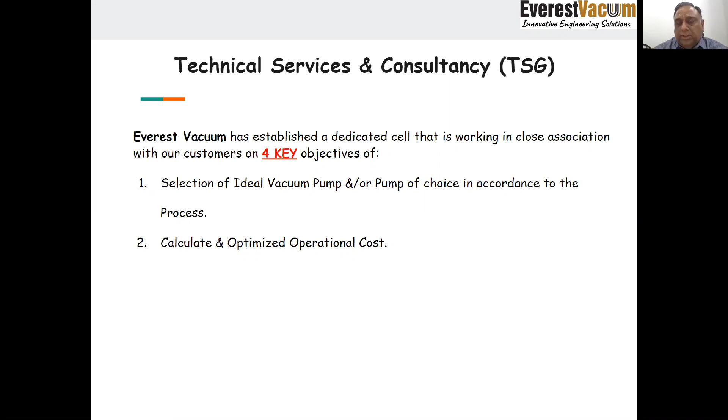So to achieve the mission 555, at Everest we have created a technical services and consultancy group. What does that group do? It has 4 objectives: selection of the ideal vacuum pump or pump of choice according to the process, basically optimizing the correct product for the right application; calculate and optimize the operational cost; right sizing of the vacuum pump for best results in terms of productivity as well as cycle time; and deciding the desired operating vacuum levels for the process to get the best yield, product quality, and operational costs.

What's important for all of you to understand is that TSG, if used efficiently, can support all your key initiatives for vacuum requirements, both in terms of selection as well as ensuring a higher level of productivity and throughput.

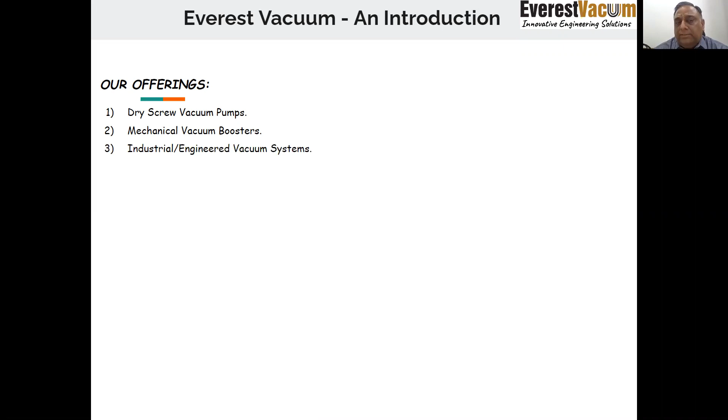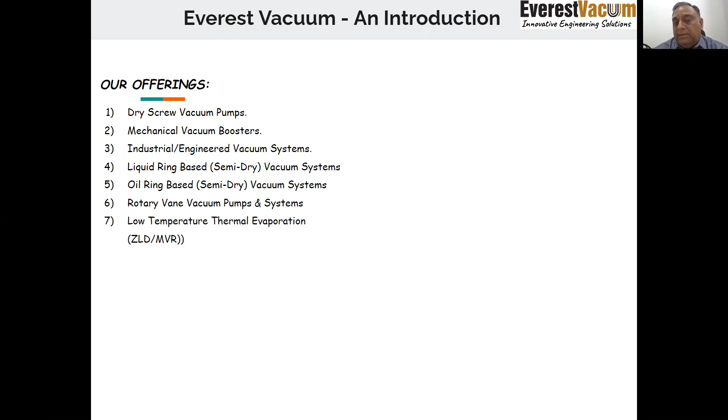So what all does Everest Vacuum do, and what are our offerings? We are into manufacturing - we are the only manufacturers of dry screw vacuum pumps in India. We also have our own in-house manufacturing for mechanical vacuum boosters. We do design as well as manufacturing of customized industrial engineered vacuum systems, which includes liquid ring based semi-dry vacuum systems, and also oil ring based vacuum systems. We also have the portfolio of rotary vane vacuum pumps, as well as configured engineered systems along with other peripherals. We are also into low temperature thermal evaporation, which is zero liquid discharge or mechanical vapor recompression.

And by usage of these offerings, what is our promise to our customers?

We ensure clean, reliable, and sustainable vacuum, improved product yield, deeper and consistent vacuum, cost and space saving by right sizing, reduced batch cycle times, and reduced operational cost. Once again, welcome to all of you.

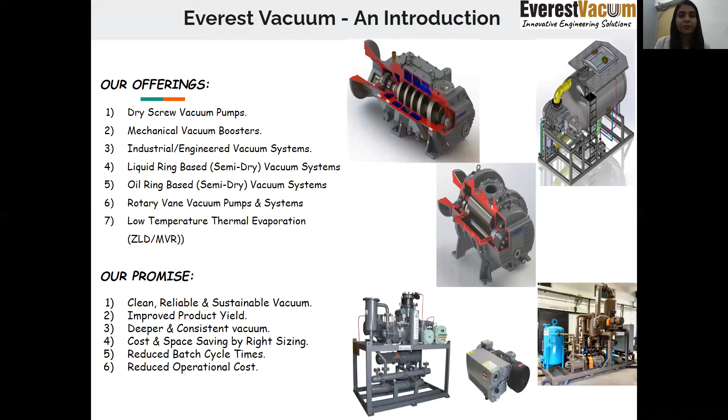So I welcome you all once again into this session regarding the operation and maintenance of dry screw vacuum pumps. I'll basically start with what we can expect out of this product. There are multiple benefits, multiple features of this dry screw vacuum pump.

It doesn't use any steam and there is no requirement for it, thereby leading to 80% power saving. There is no effluent generation in these dry screw vacuum pumps. They provide consistent and reliable vacuum levels, and by optimized sizing we can enhance productivity upwards of 20%. It is a clean, green, and environmentally sustainable vacuum solution, and we supply all these systems as plug-and-play compact skid-mounted units.

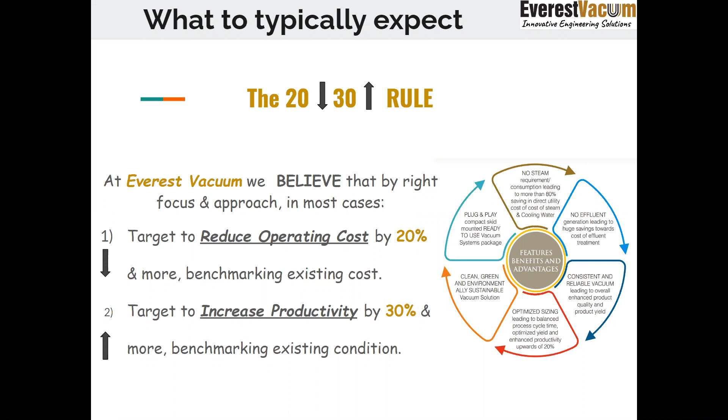At Everest, we have a 20-30 rule, which means we believe that with the right focus and approach, in most cases we can reduce operating cost by 20% and more, benchmarking the existing conditions. Likewise, we can increase productivity by 30% and more, benchmarking existing conditions. This has been proven at many customer sites, including some of your plants as well.

So coming to the webinar part, as this is about the dry screw vacuum pump, I would like to briefly start off with what a dry screw vacuum pump actually is. As the name suggests, it is a completely dry pump.

There is no oil and no water contamination with the process vapors, which is why it is called a dry screw vacuum pump, as opposed to traditional wet technologies, where the process vapors come in contact with either oil or water, thereby contaminating the process. This is drastically different—completely dry, and thereby extremely environment friendly.

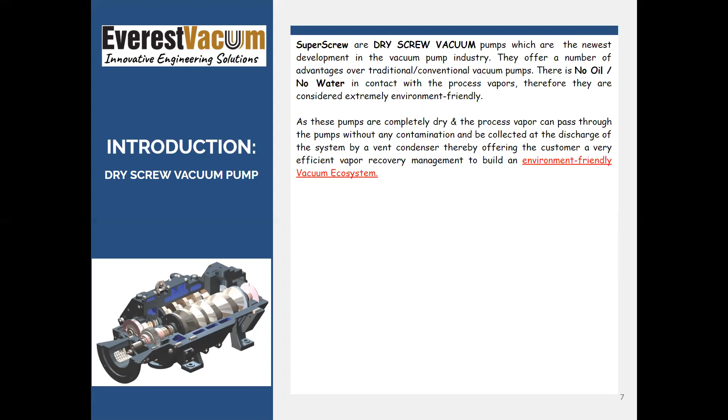Since these are completely dry pumps, the advantage is that they can directly handle process vapors, which can be collected at the discharge by condenser, having condensation at the discharge. It's much easier to condense the process vapors entering the pump there. This leads to a very efficient vapor recovery management system and ultimately creates an environment-friendly vacuum ecosystem.

As these pumps are completely dry, there is no sealing fluid inside, so they offer clean and oil-free vacuum levels. This pump is the latest technology available in the market, with very low power consumption, leading to lower overall cost of ownership. This makes our endeavor a success, making the vacuum utility a reality.

The hybrid combined variable pitch is the latest third generation that Everest is supplying. This is primarily a combination of three different pitches: primary, secondary, and the variable pitch.

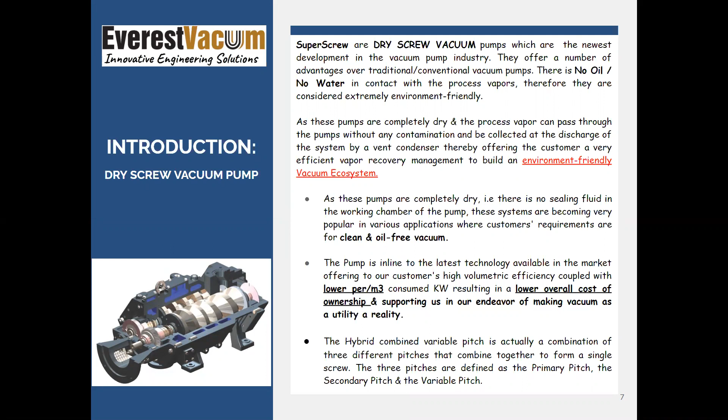Now coming to the operation and maintenance part, there are certain markings and stickers available on the pump. I just wanted to brief you all on what markings and stickers are available on the pump.

As you can see, it is a dry screw vacuum pump. There are certain stickers engraved on it, like for cooling water inlet, as it has a cooling water jacket to dissipate heat. From one end towards the discharge there is a cooling water inlet, and towards the suction, that water comes out as cooling water outlet.

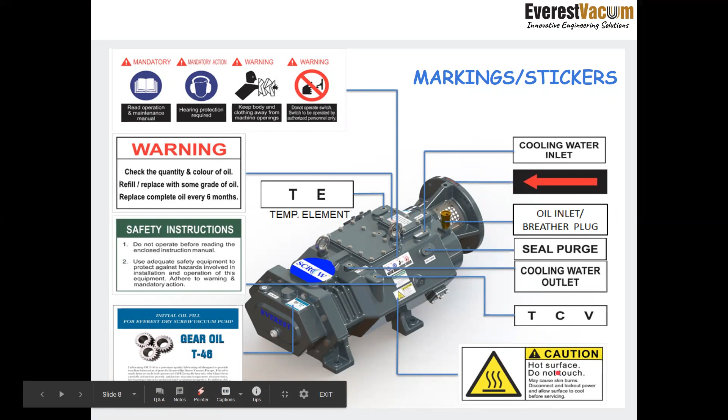Likewise, it is lubricated with oil on both sides, so there are oil filling ports, and the oil grade is also mentioned, indicating what grade of oil is to be filled. Then there are certain cautionary signs indicating a hot surface. For our CX series, the anti-corrosive series, there is a temperature control valve.

We can also get in touch with the temperature control if required in certain applications. There are certain warning signs to check the quantity and color of the oil, and the same needs to be replaced once it is dirty or after 6 months.

Coming to the safety instructions, it is well known that we should not operate the pump without reading the operation and maintenance manual. So this is all on the part of markings and stickers.

Now once the system is supplied, it goes into the plant wherein it is installed, and the commissioning comes into play. Commissioning is a very critical activity. We have a full-fledged team of our engineers who commission the systems pan-India and abroad, and it is very important because they identify any areas that need fine-tuning to achieve the optimum results.

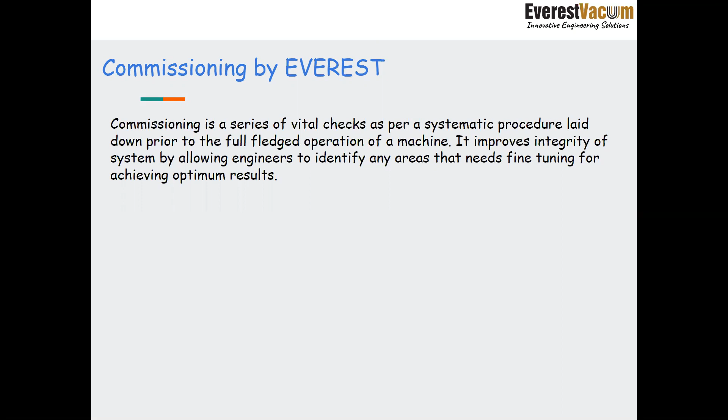Now, why is it important? Because once the system is commissioned, the customer representatives get trained on the machines and become aware about the vacuum systems. Basically, every system that we design has an inbuilt PLC logic, and it has to be run as per the standard operating procedure.

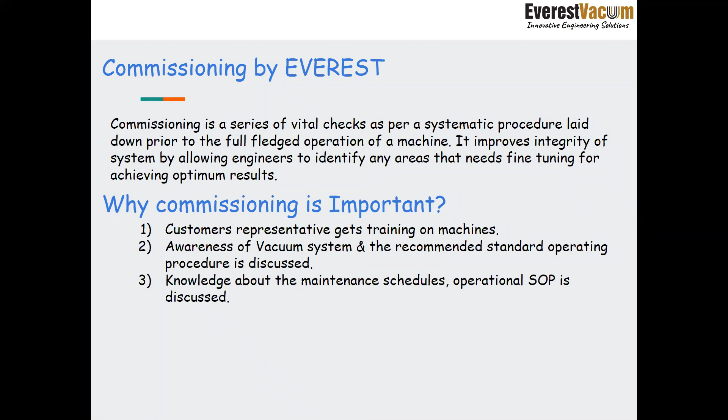During the commissioning, our engineers, when they visit the site, get in touch with the customer representatives, train them, and convey the SOP that has to be followed. So that is important - they get to know about the maintenance schedules and operational standard operating procedures, the user gets friendly with the system, and the operators adhere to the SOP.

And most important, customer-vendor interaction gets available at the personal level, which is important for the success of any equipment.

This is proven - we have commissioned many systems, and the thing that has come out is that a well-commissioned system, if it is being run in accordance with the operational SOP, can deliver up to 3 times more service on an average before maintenance. So that much criticality is there in the commissioning. We should get our systems commissioned, and standard operating procedures should be adhered to.

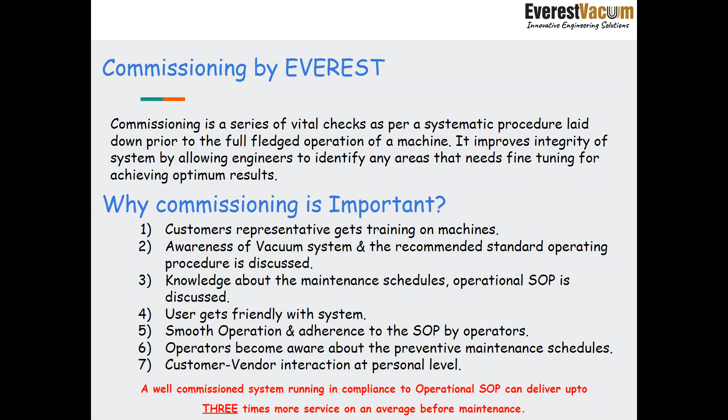So what all are the modules that we need to maintain for the operation? The key modules include a healthy electrical power supply - it should be having a healthy 3-phase power supply. And then nitrogen needs to be available.

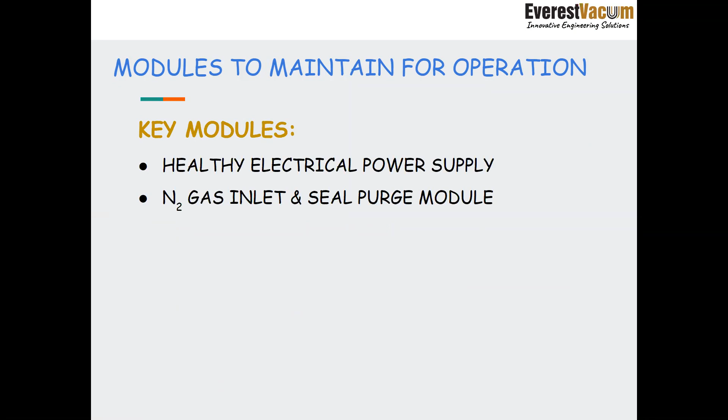There are N2 modules - inlet and seal purge modules. Instrument air for the butterfly valves or any other electropneumatic valves available in the system. Then there is solvent flushing to flush out the pump from any contaminants. Gas ballast to run the pump hot and to avoid condensation inside the pump, and a cooling water jacket module to dissipate the heat as well. So all these modules need to be maintained to function the system properly.

And lastly, there are certain utilities required like cooling water or chilling water for the condensers or any traps built into the system.

Now, installation instruction - this is basically the complete overview of how the system looks, and what precautions are to be followed. As you can see, this is a dry screw vacuum pump, and then there is a post condenser. As the condenser is at the discharge of the pump, we call it a post condenser. In some cases, it can even be at the inlet of the dry screw vacuum pump, in which case we would call it a pre-condenser.

Then there is a receiver which collects the condensate, and a solvent tank which contains the flushing agent to flush out the pump. So as we all know, dry vacuum pumping systems or any vacuum pumping systems are basically meant to pump out the non-condensables along with the saturated vapor loads.

Now dry pumps have the advantage of being able to collect the condensate at the discharge. Still, we need to ensure that only a minimal amount of carryover enters into the vacuum pump. To ensure that, we mention that we need to install a catch pot or trap prior to the pump to reduce the carryover load on the pump. The basic fundamental is that its line size should be equal to or greater than the pump suction line size.

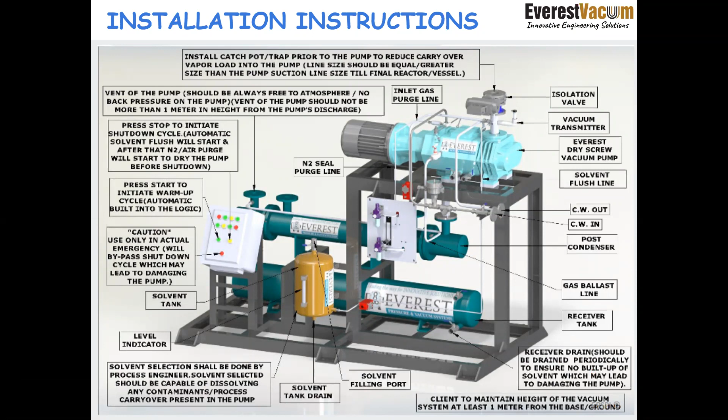One important thing is that this receiver should be drained periodically. There is a local operating station mounted on the skid itself having three basic push buttons: start, stop, and emergency. In many cases, clients have been operating the systems via the emergency button, stopping the system using it, which is highly not recommended. The reason being there are certain modules pre-fit into the PLC like start cycle and shutdown cycle. So once it is directly shut down, that stop cycle won't operate and the pump won't be cleaned. There is a caution that this emergency switch has to be used only in case of actual emergency, otherwise it may seriously lead to damage of the pump.

So during the startup, only the start button has to be pressed. It will automatically initiate the warm-up cycle inbuilt into the logic. The same is for the stop cycle as well - only the stop button needs to be pressed, and there is an automatic cycle that will come into play.

Another important thing is that solvent selection is very critical. We should be selecting such a solvent for flushing purposes that is capable of dissolving the contaminants, or process carryover, entering into the pump. So these are the basic installation instructions - how the setup should be followed and how it looks like.

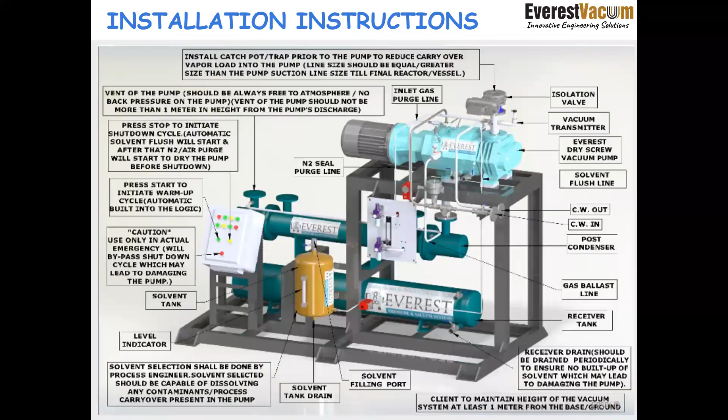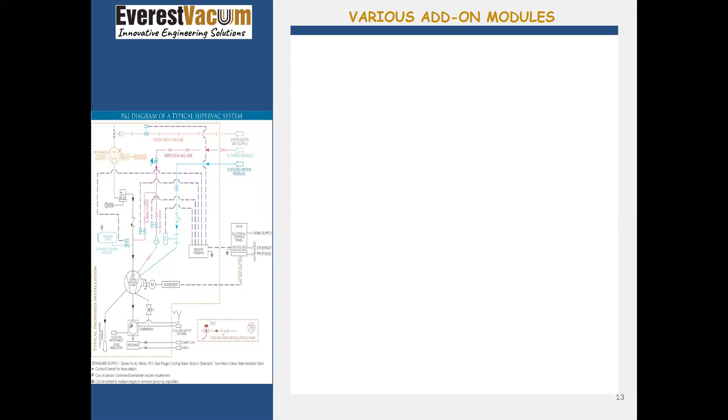So these are the modules that I was discussing in the last slide. This is also mentioned in our standard catalogs. This is a typical P&ID diagram on the left, and these are the various additional modules that Everest brings into the loop.

So the various possibilities to add on are: there can be cyclone traps to trap any particles prior to their entrance into the pump. Then there could be inlet filter housings depending upon the micron ratings - it could be either 1 micron or 5 microns. It depends on what kind of process we are into, and what particle sizes will enter into our pump.

There can be a possibility of having inlet pre-condensers. In case of supervacs, having a booster in combination with screw pumps, it could be possible that we need to trap the vapors intermediately. So there is a possibility of having an intermediate condenser module as well.

Then there are filter traps, and certain traps with demister, depending upon the process. As shown in the last slide, there can be post condensers. If there is no condensation available at discharge, then there is a standard discharge silencer available. Then there are other modules like N2 seal at inlet, which I will cover later in detail, and a solvent flushing module, gas ballast module. All these modules will be covered in later slides in depth.

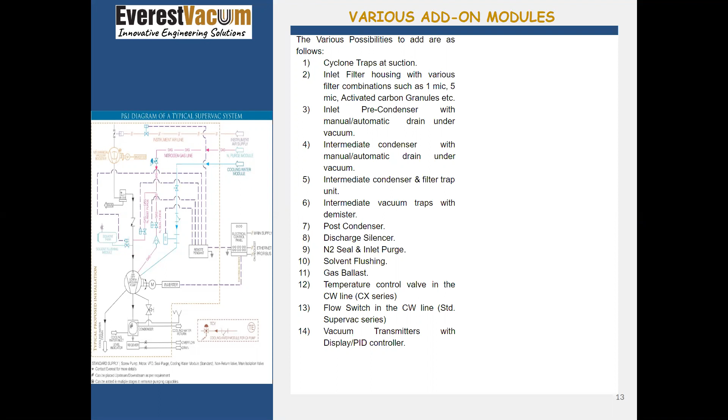Then for the CX series, that is our anti-corrosive series, we have temperature control valves. In our standard Supervac series pumps, it has a flow switch, which makes the fail-proof system so that the pump doesn't run dry. And then there are vacuum transmitters available, either with only display or with proportional integral derivative, to run the vacuum pump as per the vacuum levels required.

Then there is a startup cycle and shutdown cycle - all these are pre-fed into the PLC depending upon the application, including an intermittent flushing cycle as well. Then there is one local push button station, which we call at Everest a remote pendant, in flame-proof construction for hazardous areas. Then there can be certain electrical control panels for safe areas, which have 3 different modes of communication - Ethernet, Modbus, and Profibus.

Then there is an option of having a float level switch in the solvent tank, so as to make the system fail-proof - there is always availability of solvent in the solvent tank. Then there can be some Bourdon gauges present at the suction of the vacuum system in certain configurations.

For electrical motors, it is by default IE2 in flame-proof construction and IE3 in non-flame-proof construction, premium efficiency motors. Then there are ATEX certified systems, CE certified systems, bypass arrangements to reduce the vapor load on the machines, and electro-pneumatic isolation valves to separate our vacuum pumping system from the client's process. Then there is availability of flexible expansion joints, bellows, receivers, and a temperature element in the cooling water jacket to automatically trip off or cut off the pump in case the temperature exceeds preset levels. Then there are rotameters and variable frequency drives available. So these all are the add-on modules that Everest has.

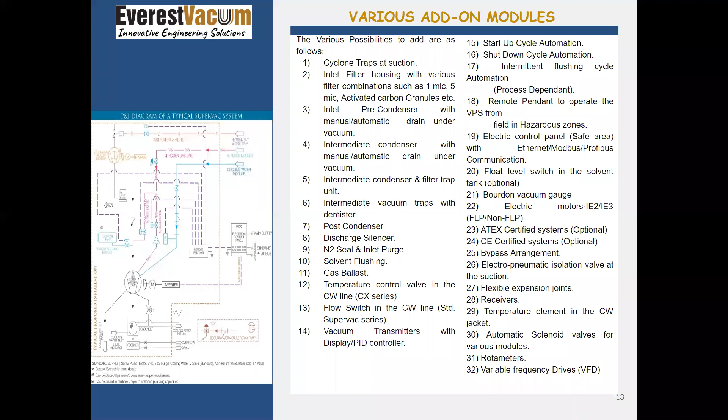So with the checklist before startup of the pump, what is the startup cycle which we are discussing?

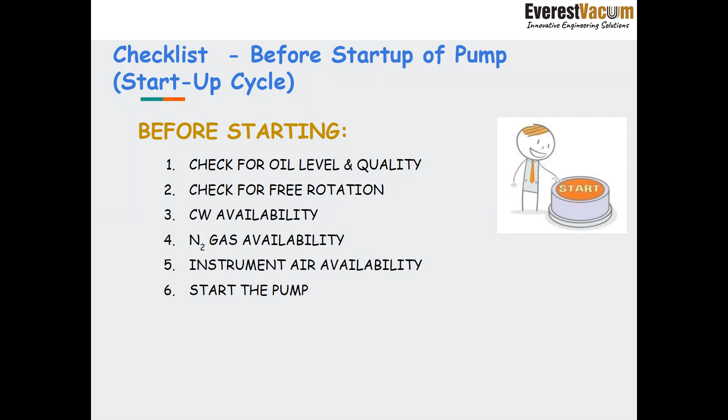Before starting, we need to check for the oil level and quality. We need to ensure that the pump rotates freely. There is the availability of cooling water, nitrogen, and instrument air. Thereafter, having availability of all these 5 points, we can start the pump.

Then comes into play the programmable logic controller, wherein the program has been pre-fed that will automatically start, and there will be a 30 minutes warm-up cycle. The isolation will be closed and the pump will start operation.

And why is this warm-up done? It ensures that the pump reaches an optimum temperature level. Because if it is too cold, there is a very likely possibility that condensation would take place inside the pump. So this warm-up cycle for 30 minutes ensures that the pump comes to an optimum temperature. It is neither too cold nor too hot.

And certainly these parameters may vary process to process. In some cases, the warm-up cycle required could be less, in some cases it could be more.

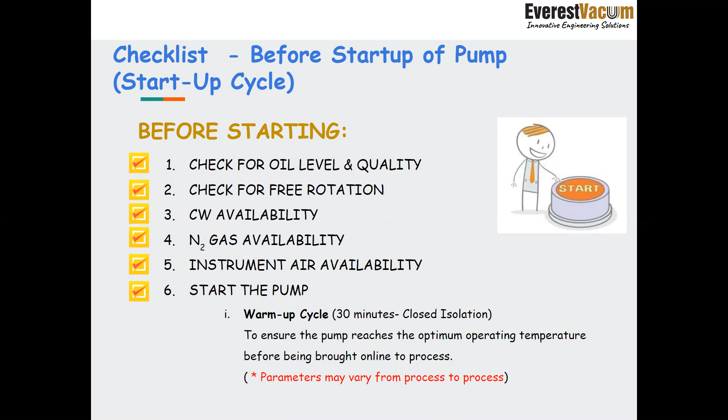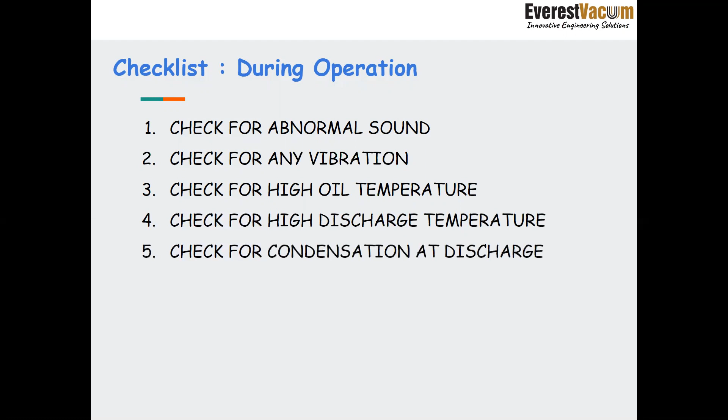So now comes the checklist during operation. During operation of these machineries, we need to check for any abnormal sound, for any vibration, for high oil temperature, high discharge temperature, and whether abnormal condensation is taking place at the discharge. Check for the overcurrent, and if there is a need of solvent for intermittent flushing, is it available or not?

So these points need to be ensured during the operation of the dry screw vacuum pump.

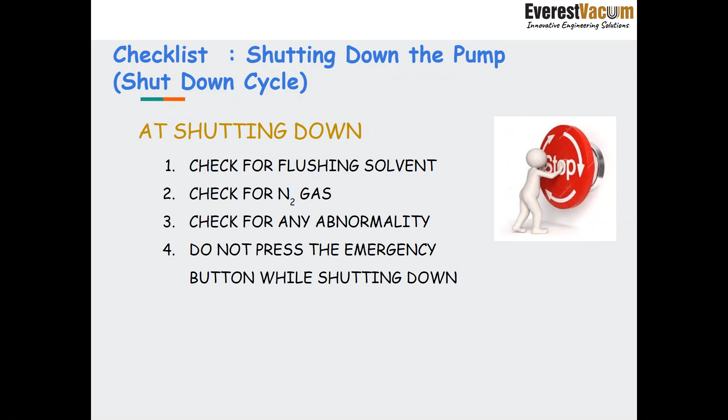So now comes another important cycle that we call the shutdown cycle. This comes into play when we stop the pump. During the shutdown, we need to ensure that there is availability of flushing solvent, nitrogen gas is available, there is no abnormality, and as already mentioned, we must not press the emergency button while shutting down. Only the stop button has to be pressed.

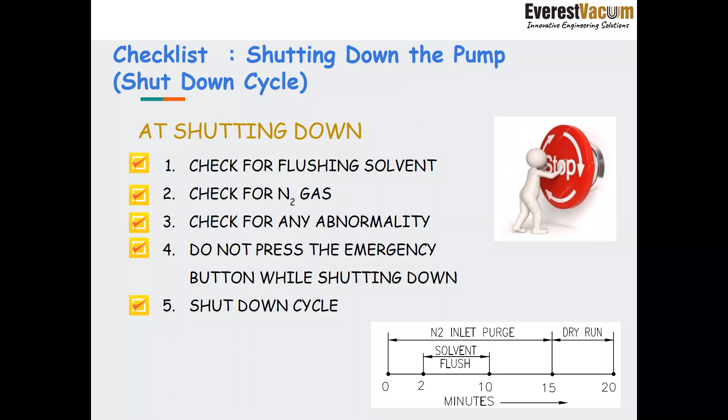So another activity that Everest has come up with is we have standardized our products in terms of systems as well. Super Screws, when we call Super Screws, are the dry screw vacuum pumps having various add-on modules, like I have mentioned in the last slides. And SuperVac is a combination of dry screw vacuum pump and the booster.

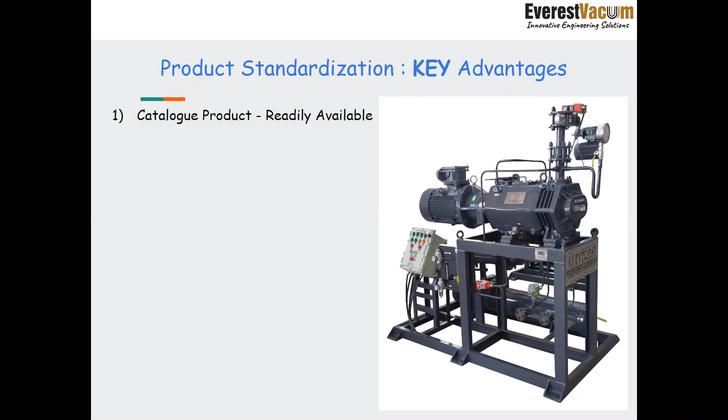So we have standardized various products, and this looks like the standardized product, and their key advantages are that it has become the catalog product. It is readily available. There is commonality of parts across the various modules. Certain accessories are common throughout the standardized activities, standardized models.

And in terms of energy efficiency, also we have standardized by default IE2 motors for flame proof and IE3 in standard. So this is one rating better than what we used to supply in the standard ratings.

Coming to the material of construction, by default it has gotten to be SS316, and it is future ready. Anytime any upgradation is possible, we can have the add-on modules added into it if required. Module upgradation is possible over there.

Then, across the standardized products, we have standardized modular accessories as well. And for customers, it is the shortest delivery time possible with these products.

We have certain systems which have been pre-designed for drying and distillation applications. If required, there are condensers pre-defined, and for drying applications, filters are predefined and added into the standardized activity as well. All the accessories like condensers and filters have been standardized, they are readily available, and there's an anytime option available to add on these modules into the system.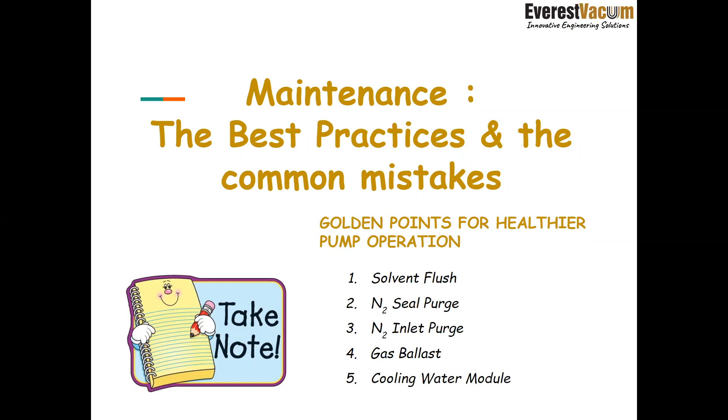Now coming to the maintenance part, the best practices and the most common mistakes - these are the golden points for healthier pump operation: solvent flushing, N2 seal purge, N2 inlet purge, gas ballast, and cooling water module. I'll be covering all these modules one by one because they are very critical for the health of the machinery.

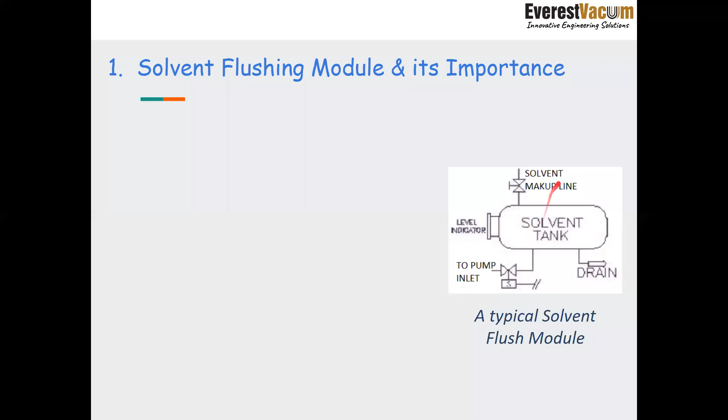So what is its importance? As mentioned, solvent flushing after the batch is very effective, and it is the only method available, the best method available, to clean out the pump of any contamination, any buildup, any blockage of the process material.

Now what happens in the process when we are into certain applications? The carryover vapor, the product along with the solvents, will come up into the dry screw vacuum pump along with the non-condensable load as well. So it will slowly and gradually start accumulating inside the pump. And if it is not cleaned after certain operation - if it's a continuous process, after certain hours, or in batch application, after certain batches - the accumulation would be so much that it will ultimately lead to the seizure of the pump.

That is why we need to clean out the pump, and it is recommended to be used with inlet purge for most effectiveness. The reason, as I mentioned, is an inlet purge is basically a nitrogen purge to break away the vacuum, because if the vacuum is too high, the purpose of liquid cleaning won't be done. So this is done to break away the vacuum levels and to ensure the effectiveness of this solvent flushing agent.

Another critical parameter is the selection of proper flushing solvent. It should be having the capability to dissolve the contaminants. It should be miscible.

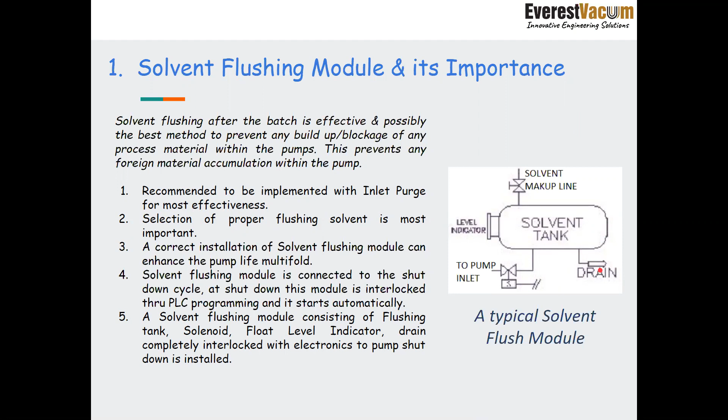So a solvent flushing module consists of a flushing tank, and then this solenoid, then there is an option available of float level indicator, then drain, and it is all pre-programmed to clean out the pump towards the end of the cycle. So done right, it has some of the most promising results.

So what does this gas seal purge do? It sustains positive pressure during operation of the mechanical seal, and it ensures that the product carryover, process carryover, that comes into the pump doesn't get into contact with the mechanical seal, and it protects against process contamination and the contamination of oil at the end. So it is very critical - if the process carryover is stopped from entering into the oil chamber, we are enhancing the life of the overall product: the life of the seals, bearings, oil - everything will be under control.

So what does it do? It extends the life of the mechanical seal by creating a positive inert atmosphere around it.

It consists of a pressure regulating valve, non-return valve, and a solenoid valve, which is interlocked into the PLC, programmed logic controller, for automatic operation.

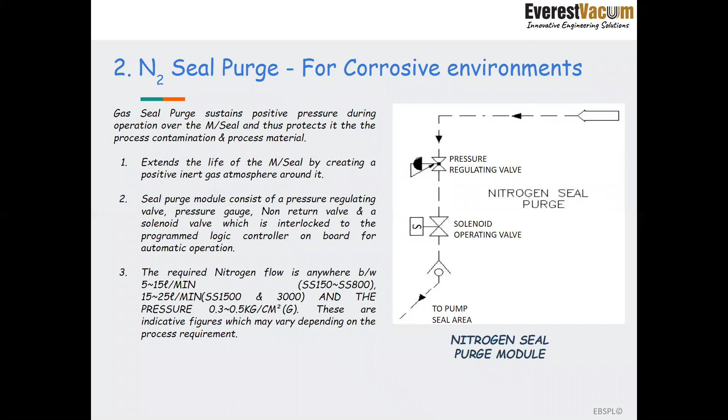The required flow is anywhere between 5 to 15 LPM for our 4 models, that is 150, 300, 400 and 800 meter cube per hour dry screw vacuum pumps. And the pressure required is 0.3 to 0.5 kg per centimeter square gauge.

At plants, the pressure is much higher. That is why we have installed a pressure regulating valve over here.

Another feature of this module is that it can be retrofitted as a standalone unit on old installed pumps available at the site also, because it is very much possible that certain modules might have been damaged after certain years of running. So this seal purge module can be retrofitted as a standalone unit in those older supplies as well.

So seal purge is very effective in highly corrosive atmospheres.

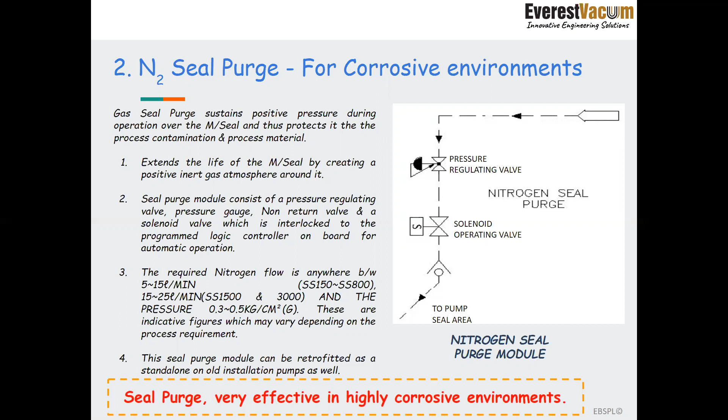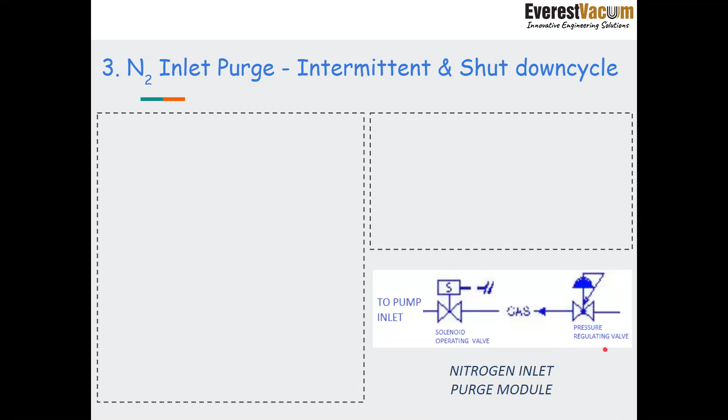The solvent is used to clear and flush out the process buildup accumulation from the pump internals. This cycle can either be done periodically, known as intermittent. Over certain days, process carryover keeps accumulating into the pump, so it needs to be cleaned periodically, and that part is played via intermittent flushing during operation itself.

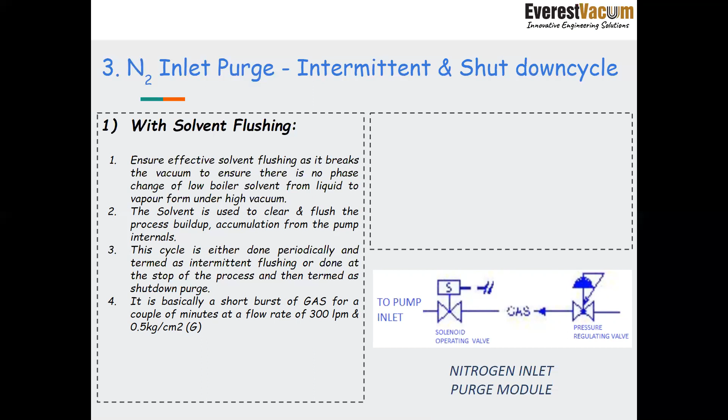So what is it? It is basically a short burst of gas for a couple of minutes at a flow rate of 300 LPM and 0.5 kg gauge pressure. The module consists of a pressure regulating valve and a solenoid operating valve interlocked through a PLC.

The other variant comes into play when the pump is stopped. At that time it ensures the pump is completely dry, with no solvent traces left in it. This removes the solvent left over in the pump after the solvent flushing.

During stages 1 to 5, there is continuous compression happening inside the pump. At point 4, what Everest does is purge a certain amount of gas into the pump so the vapors that have entered don't convert into liquid.

Because if there is no purge of gas at stage 4, the line from 4 will go to 5 dash, and these vapors will start converting into liquid. We need to stop this because we do not want compression happening inside the dry screw vacuum pumps, as liquid is incompressible and will damage the pumps. If the liquid does not go out properly, it can create back pressure and damage the pump.

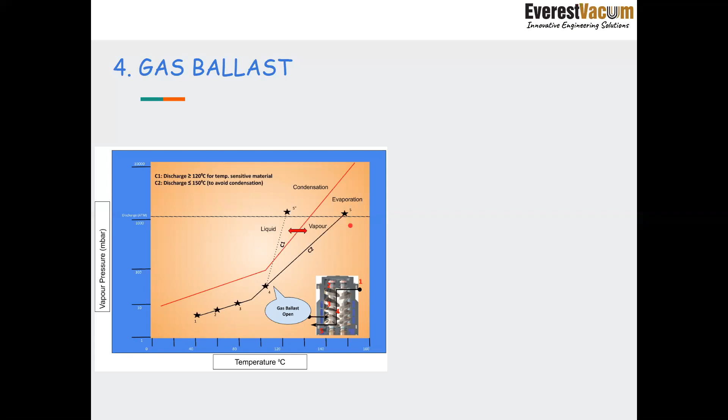So at point 4 we purge a small amount of gas. It increases the temperature and keeps the vapor phase in the vapor phase itself. This is what the gas ballast module looks like. From the pump discharge, we have one needle valve which controls the amount of gas to be purged into the pump body.

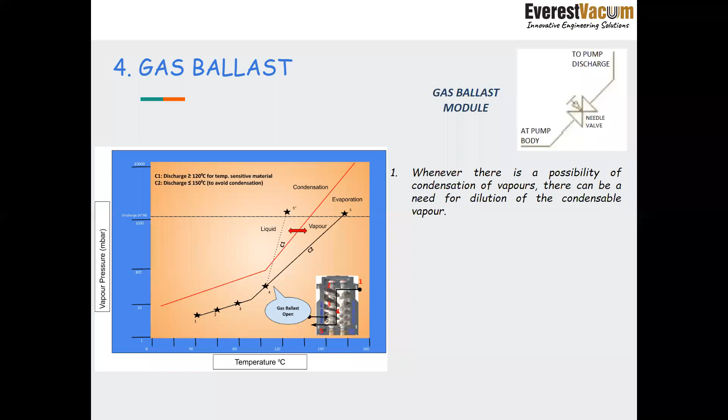So wherever there is a possibility of condensation, we need to ensure that we come up with the gas ballast module. It will dilute the condensable vapors. In such cases, air, nitrogen, or process gas is used. This again depends on the process, what needs to be inserted depending upon the application.

It can be an input for the gas ballast, and as per the process requirement, to overcompress the vapors at the point wherein condensation is just about to take place, we inject a small amount of gas. It increases the temperature and ensures that the vapors don't convert into liquid.

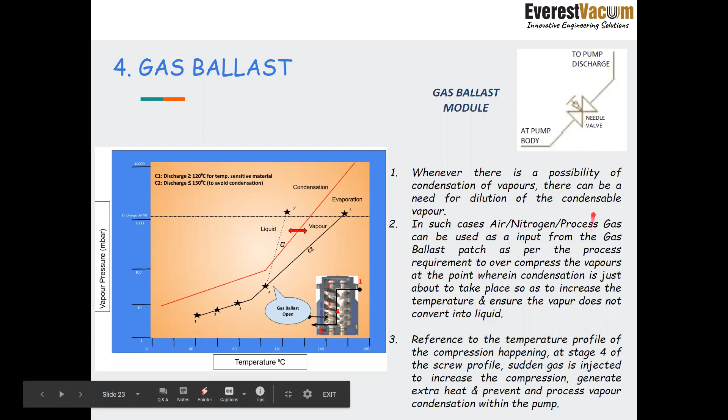So referring to this diagram, at stage 4 of this screw profile towards the discharge, sudden gas is injected, which increases the compression, generates extra heat, and prevents the process vapor condensation within the pump. So this is the basic purpose of gas ballast, to avoid condensation inside the pump.

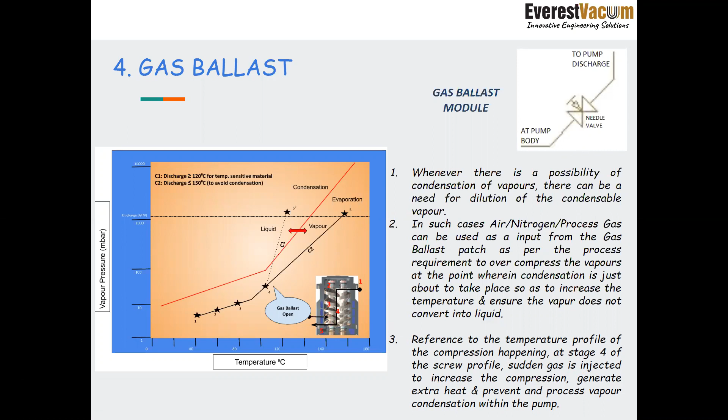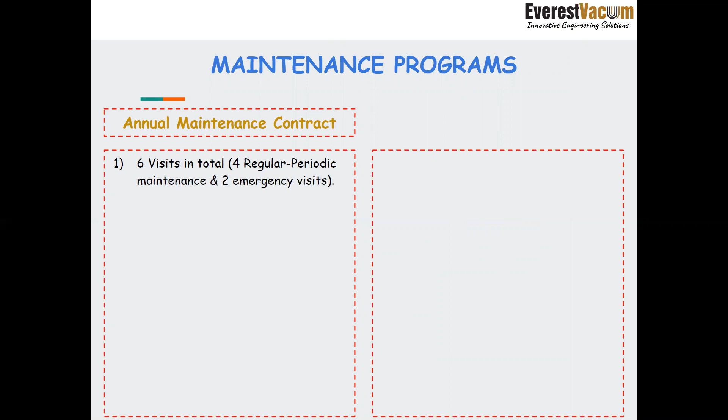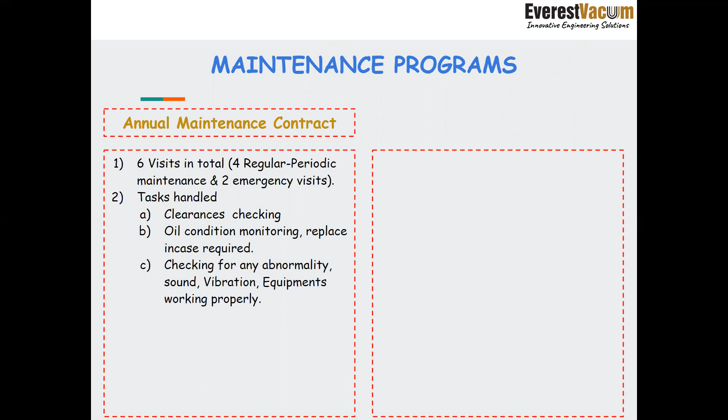The tasks that Everest does during these visits are: we check for the clearances, we check for the oil condition and replace if required. Then there is a checkup for any abnormal sound or vibration. We also check the equipment, the instruments, like the various modules, nitrogen seal, nitrogen inlet, instrument air modules, solvent flushing solenoids. All these are checked thoroughly by our engineers.

Then if there are filters, they are cleaned and checked whether they can be reused or need to be replaced. Then repairs of the screw pump if required. And finally, the performance is checked and the customer is satisfied by providing the vacuum levels, current limits, and vibration limits within control.

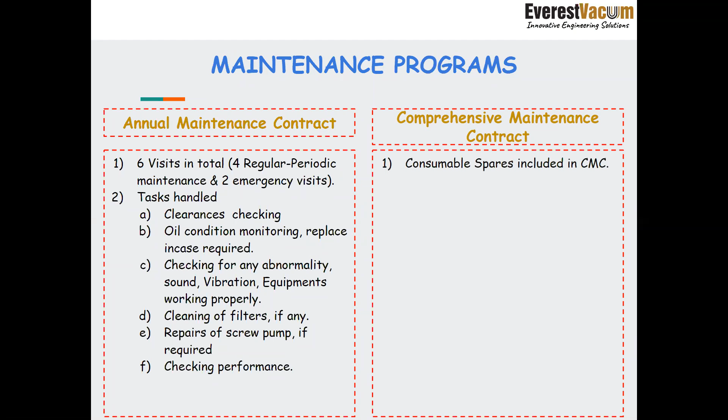The other program that Everest has is the comprehensive maintenance contract. This is basically the inclusion of consumable spares into the annual maintenance contract. Other parameters remain the same, the tasks handled are all the same. The only change is we have got the consumable spares included in this contract.

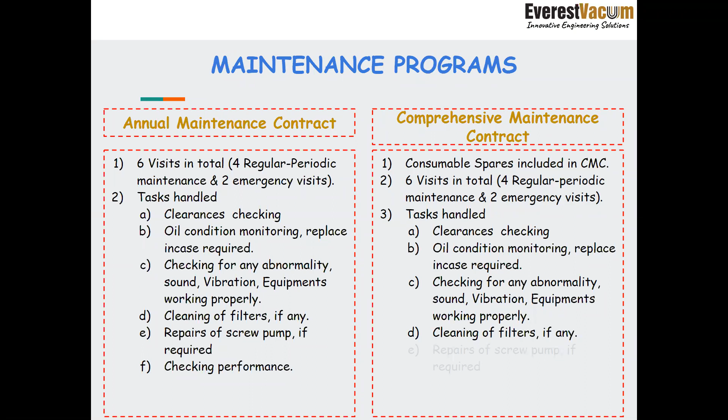So as we all understand, and maintenance professionals would very easily understand it, timely maintenance and preventive health checkup is a must for any healthy equipment. At Everest, we fully understand its importance, and we have aligned ourselves with the following things to ensure that the machines are properly maintained.

And for that, to achieve all these parameters, we have off-the-shelf standard periodic spare kit bundles available, ready stock for hassle-free purchase. Then there are special comprehensive maintenance contracts to deliver maximum uptime, and they improve the efficiency throughout its life cycle. Then there are our team of experts available regionally. They can be contacted at any time, and they bring you the peace of mind.

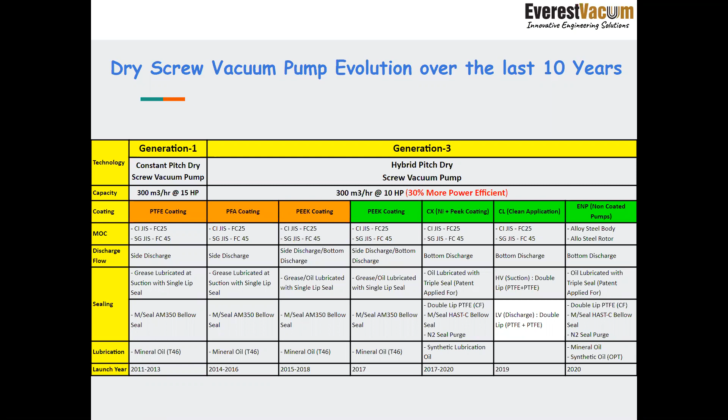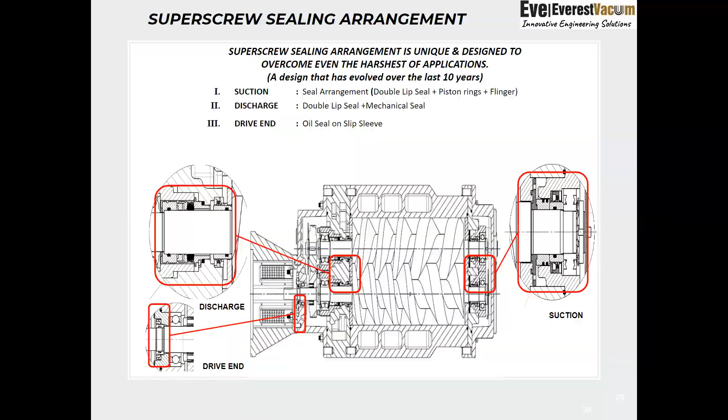This is the cut section view, how the dry screw pump looks like internally. This is the cooling water jacket. These are the screws. This is the casing. This is the suction end having bearings and double lip seals. This is the discharge, bearings, double lip seals and the mechanical seal. And finally, towards the drive end, there is the oil seal.

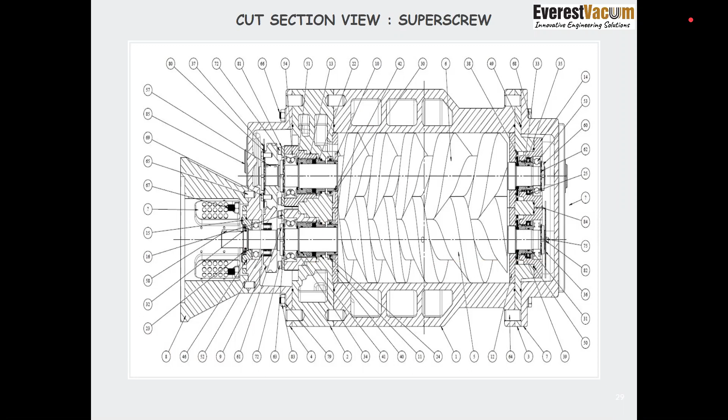Now coming to the vacuum pump inspection schedule, this is already provided in the operation and maintenance manual for the dry screw vacuum pump, but still we need to take care of all these small points because these get missed in the field. So that is why I again mentioned over here, what is the vacuum pump inspection schedule? There are certain parameters which need to be maintained daily, others on monthly basis, some on quarterly, 6 monthly and yearly basis.

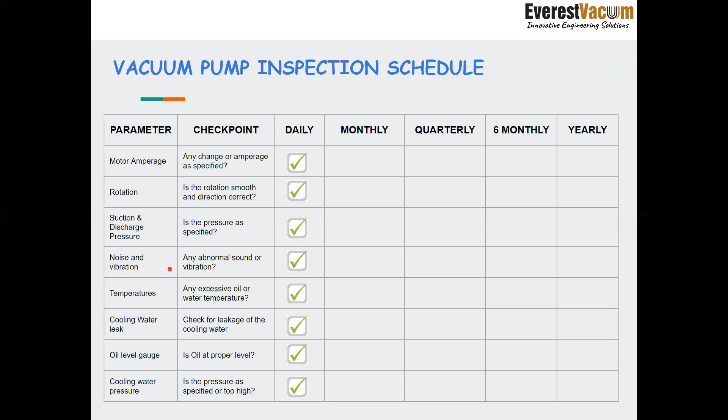So daily we need to ensure, we need to check what is the current being drawn by the pump. Is it within limits? Is the rotation correct? Is the suction and discharge pressure within limits? Is there any abnormal noise? Temperatures, cooling water leakages, oil level gauge, all these need to be checked on a daily basis.

Coupling alignment needs to be checked monthly, along with oil level monitoring and lubricant color checking. On a quarterly basis, we need to check the suction and discharge piping for any accumulated dirt or scale that needs to be cleaned. For piping and utility, it needs to be inspected six monthly. And yearly, we need to check the pump casing internals and screws, mechanical seal, gear, and other parts. So this is the inspection schedule that we need to follow for healthy pump operation.

Now another parameter that gets neglected at the site is the coupling mounting. Sometimes we have a healthy dry screw vacuum pump, but there is a certain mistake in mounting the coupling which leads to its failure. So at Everest we have taper lock bush couplings, and it is very easy to install. That taper lock bush is directly inserted, and then its screws are located on the shaft and tightened, making it very easy to mount the coupling.

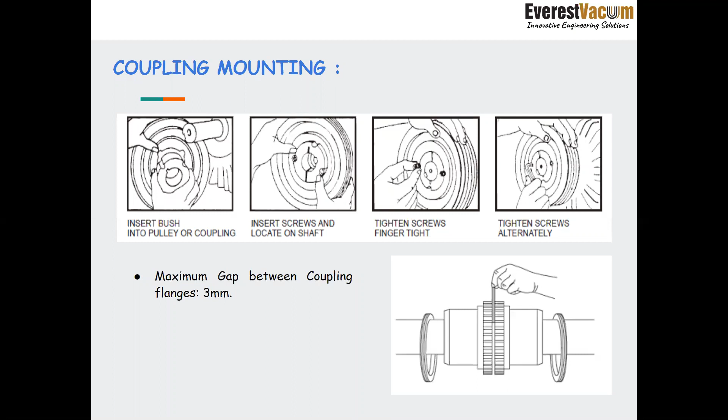It is basically an error-free operation, but still what we need to ensure is the maximum gap between the coupling flanges shouldn't exceed 3 mm. This is the basic requisite. We need to clamp the grub screws and use feeler gauges to measure the gap and any misalignment. This is critical, the usage of feeler gauges, not any scale or anything, because we are talking about 3 mm into microns. So we need to have the particular instruments available with us.

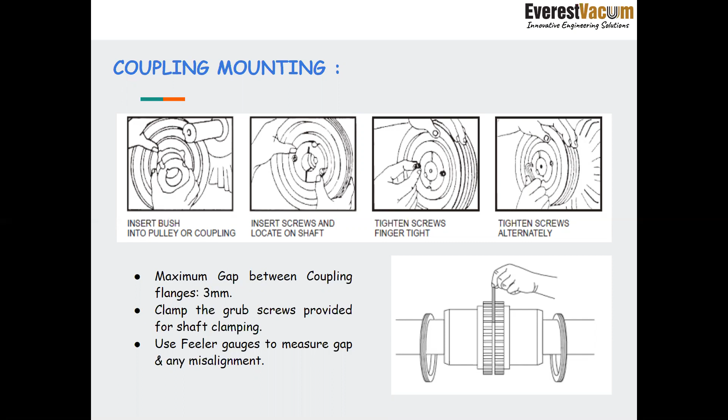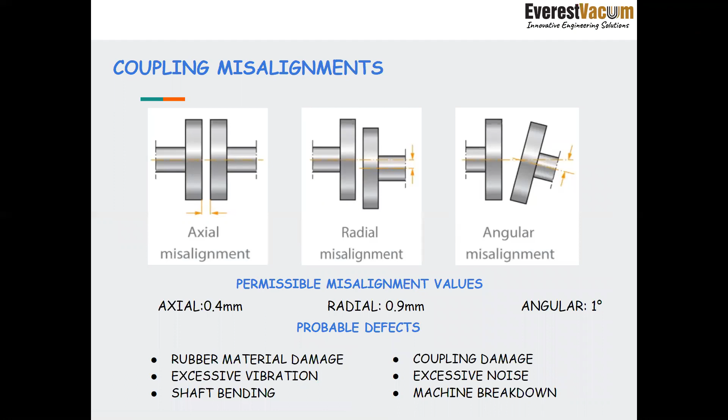Then these are the coupling misalignments. It could be either axial, radial, or angular misalignment. What is permitted is axial misalignment of 0.4 mm, radial of 0.9 mm, and angular of 1 degree. So what can be the probable defects if it is misaligned? Rubber material will be damaged, there could be excessive vibration, coupling can be damaged, there can be excessive noise, and it can even lead to shaft bending and machine breakdown ultimately. So that much is the criticality of the coupling mounting, we need to take care of this.

Then oil level and condition monitoring. Oil is being used for the lubrication of gears, bearings, for mechanical seal film and heat dissipation. With oil there can be two conditions, either the oil level could be too low or too high. If it is low, it can lead to the seizure of the gears and bearings, and mechanical seal face can be damaged. And if the oil level is high, oil temperature would get elevated and it can cause high gear noise, affecting various other components in the drive end and non-drive end.

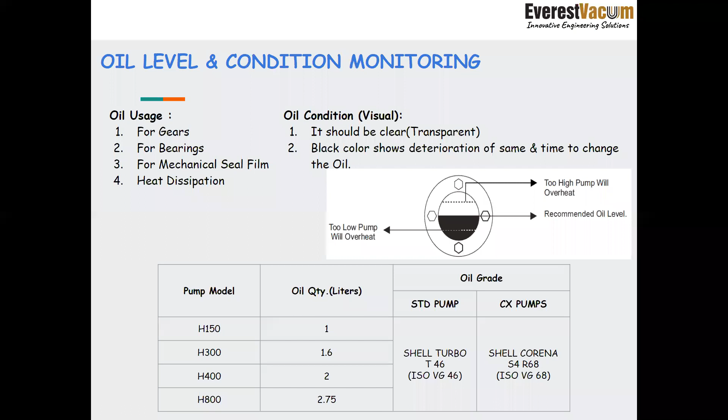So oil condition needs to be checked visually. It should be transparent, and if it is black, it shows that the oil has deteriorated and it is time to change the oil. The level to be maintained is half the sight glass. These are our different dry screw vacuum pump models, with the quantity of oil required and the grade. For standard PEEK coated pumps, it is T46, and for anti-corrosive series, nickel PEEK coated pumps, it is S4R68. This particular grade has to be followed, because one is a mineral oil and the other is a synthetic oil.

Now, how do we control the contaminants? As we have been discussing, we need to avoid contamination entering the vacuum pumps. How do we do it? There could be process vapors entering the pump and condensing inside it. So how do we avoid it? We need to ensure certain gas ballast or dilution techniques, which is basically the hot pumping we discussed in the gas ballast module. We need to ensure the temperature is such that condensation cannot take place. The temperature to be maintained is above the dew point temperature. This needs to be ensured in the dry screw vacuum pump.

Now another problem that arises comes from dust and particulate matter. There are certain processes wherein these contaminants, these particles, would enter into the dry screw vacuum pumps. So we need to ensure that we have got certain traps, certain filters in position, so that they do not directly enter into the dry screw vacuum pump.

And third is the dust from corrosion. It is basically the proper selection of the material of construction, because if it is not compatible in certain applications, like mild steel or SS304 is not compatible, then we need to go in for a higher grade of material. We need to check whether it's compatible or not.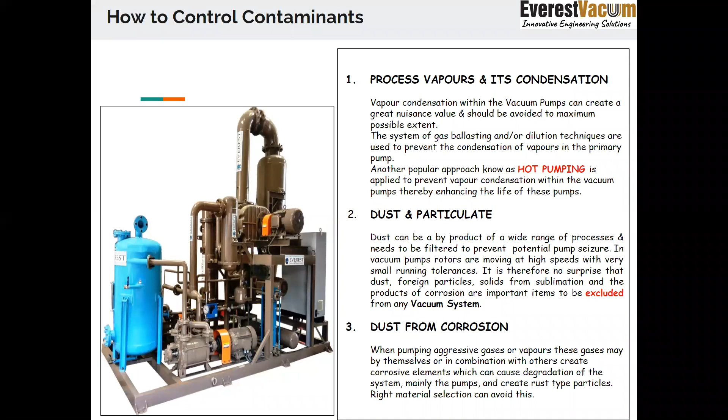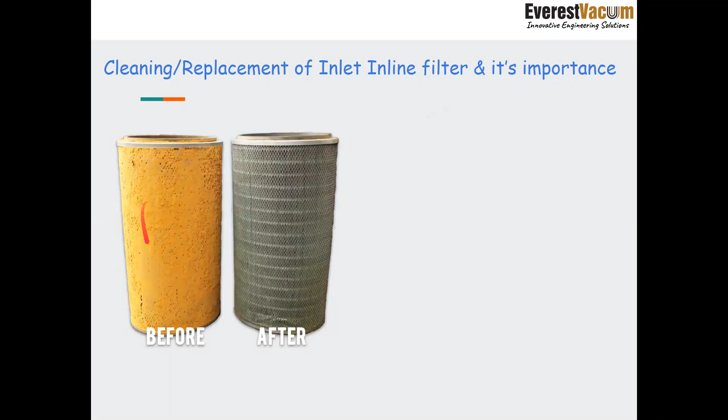Now, there are certain inline filters provided in our vacuum systems to enhance its life. So how it is to be cleaned and replaced, we have covered in this slide. This is how the contaminated filter looks like. It has got a lot of powder deposition on its outer and inner periphery. And after cleaning, it looks like this.

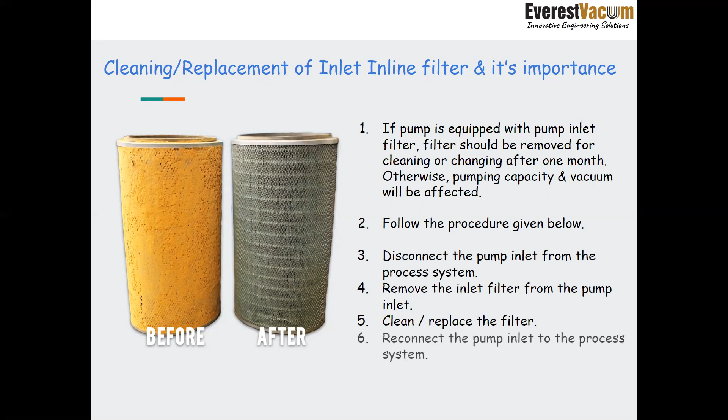So if the pump is equipped with inlet filter, it should be removed for cleaning. Otherwise, it would lead to the drop in the pumping capacity and vacuum, which will lead to trouble in the process. So how is it to be cleaned? We need to disconnect the pump inlet from the process. We need to remove the inlet filter, and we need to clean it either with water or whatever it is miscible with, and then with clean dry air, and then we can again reconnect it to the process.

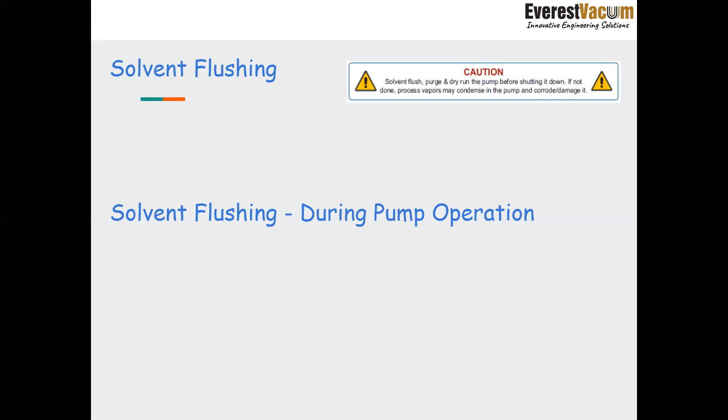Next is solvent flushing. As we have discussed throughout the webinar, how critical solvent flushing is. The objective is that it prevents blockage of pump due to material buildup, accumulation inside the pump. So it eliminates possibilities of accumulation of process material after stoppage.

It is very critical that after the process has been completed, we flush out the pump, we clean out the pump of any contamination. Otherwise, it can lead to the seizure of the pump and serious damage to the various components available in the dry screw vacuum pump. It can even lead to peel off of the coating and damage to the major components as well.

So for solvent flushing during pump operation, the quantity required is 10 liters. It again depends on the process. And we need to ensure that the discharge is free, because if the liquid is not able to vent out, then it will again create the problem.

And inlet purge has to be used with solvent to break the level of vacuum. Thereafter, the solvent flushing cycle has to be started. And we need to ensure that after the solvent flushing, the pump has been cleaned, so that we can very easily check by seeing the color of solvent at discharge. If it is still contaminated, we need to repeat the cycle. If everything is as per the plan, then the pump is ready for the next operation.

So the caution is: solvent flush, purge and dry run the pump before shutting it down. If not done, process vapors may condense inside the pump and can corrode and damage it.

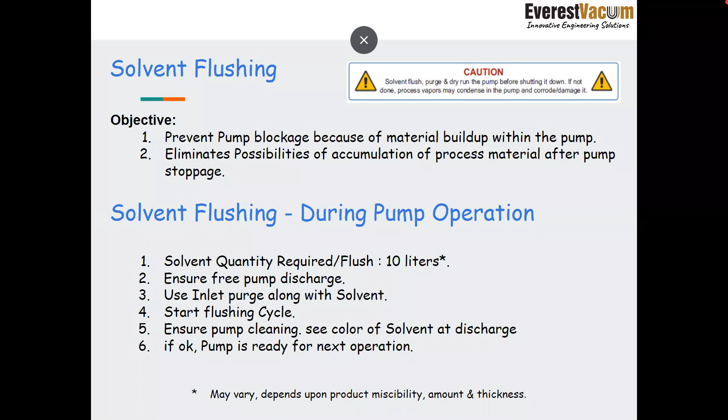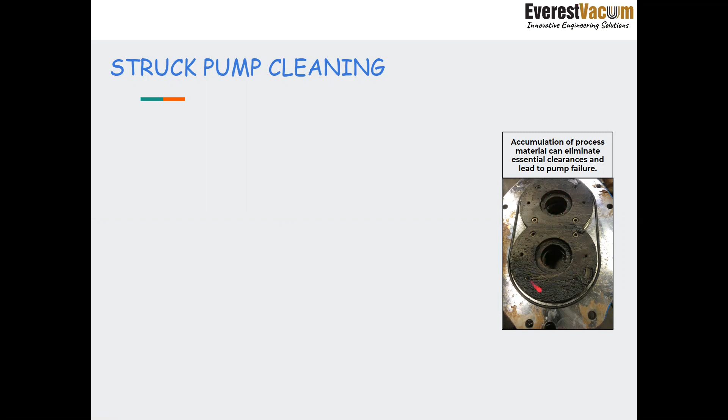Now, another problem that we have encountered in the process industry is the pumps get stuck. There is a lot of powder, a lot of carryover accumulation inside the dry screw vacuum pump. Now you can see in this figure, there is accumulation of process material, and what it does is it eliminates the essential clearances and leads to the failure of the pump. There's a lot of product buildup on this end plate.

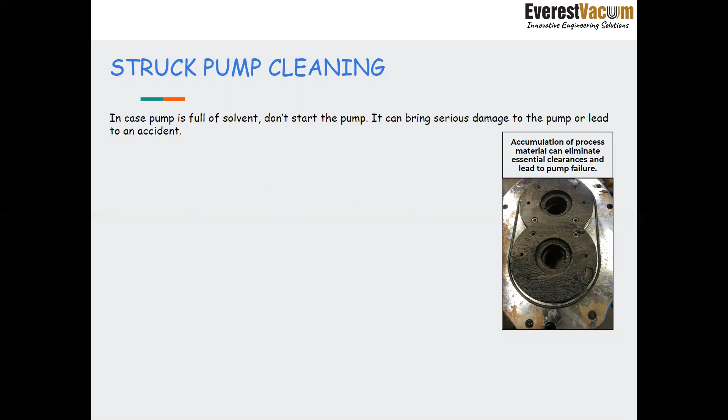So firstly, we need to ensure that such a condition doesn't arise, because if this condition has arisen, it has already created a lot of damage to the pump. So in case we cannot control it, then we need to ensure that it is cleaned in this way. So in case the pump is full of solvent, don't start the pump, because it can bring serious damage to the pump or lead to an accident.

Now, why has this condition arisen? Because carryover has come above the pump's handling capacity. Highly viscous material has entered into the pump, and most likely the pump solvent flushing has not been followed, or either the solvent was not miscible with the product. So how do we resolve it? If such a condition arises, what do we need to do?

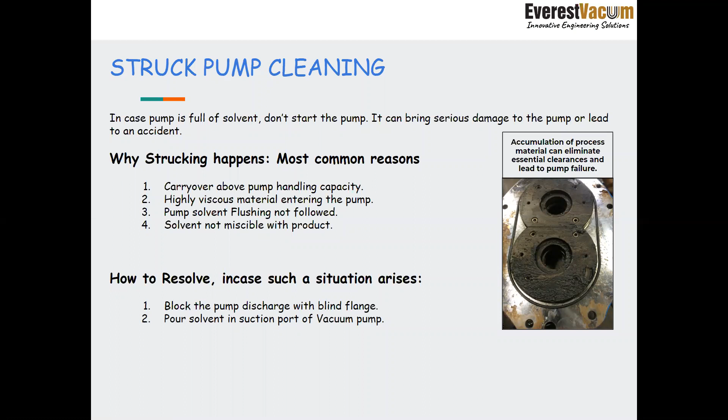In that case, we need to block the pump discharge with a blind flange. We need to pour the solvent into the suction port, fill it thoroughly and leave for 1 hour. Then we need to rotate the shaft with a chain wrench. If rotated, then drain the solvent by removing the discharge block. Now this is very critical that the shaft has to be rotated with a chain wrench.

In industry, a pipe wrench is being followed. So we do not need to have this rotation by a pipe wrench. This is a chain wrench and it doesn't have that much impact, because otherwise the shaft can get damaged. And even if still the jamming doesn't go, then repeat steps 1 to 4. And if it is severely damaged, then you need to contact us for our service support. It is very critical to take caution not to apply excessive force, as it may damage the pump shaft.

Another cleaning operation is for the pump jacket. As we all know, these dry screw vacuum pumps have a cooling water jacket which ensures heat is dissipated properly, with no localized heat zones inside the pump casing, which ultimately increases the life of components and coating. So the objective is to have a clean water jacket with minimal contaminants and dirt, to have efficient heat dissipation and maintain an accurate thermal profile.

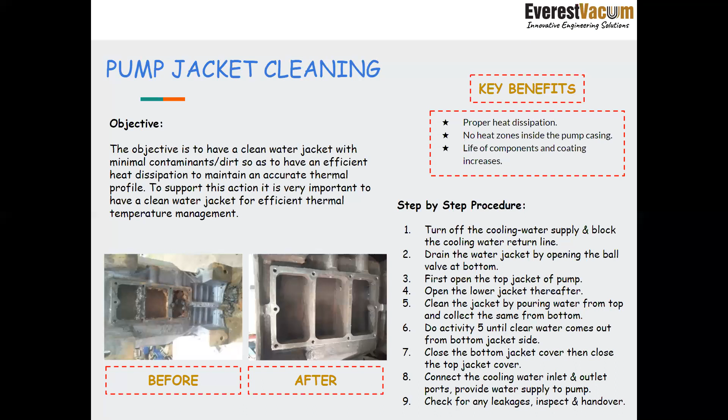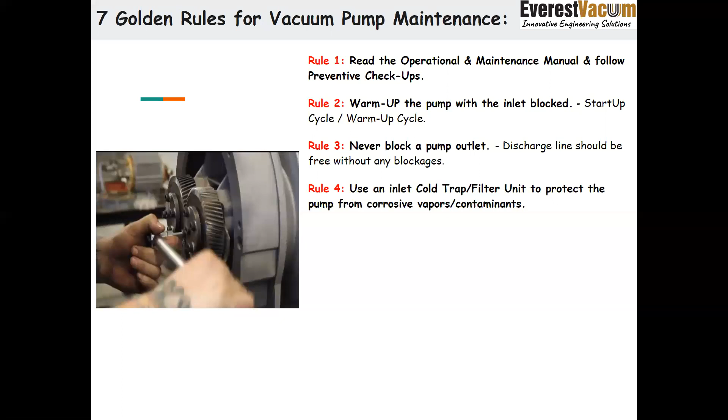Rule 4 is to prevent the vacuum pumps from excessive vapor loads. Use an inlet cold trap or filter unit to protect the pump from corrosive vapors and contaminants.

Rule 5 is to use the gas ballast when working with condensable vapors, because we need to avoid condensation inside the dry screw vacuum pump.

Rule 6 is protect the pump from particulate with an inlet filter. This depends upon the micron rating, whatever the particle size coming into the dry screw vacuum pumps. So it is process dependent.

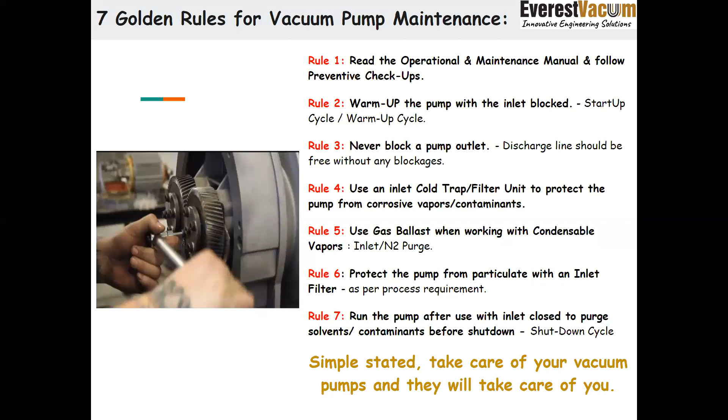Rule 7 is run the pump after use with the inlet closed to purge solvent contaminants before shutdown. The shutdown cycle has to be thoroughly followed; it is already pre-programmed for everyone's ease. The only request is that we do not press the emergency button, and operate it via the stop button instead. So simply stated, take care of your vacuum pumps and they'll take care of you.